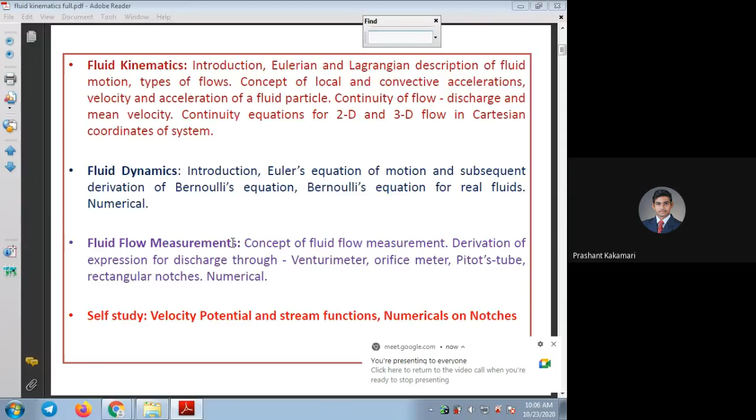So coming to that left out problem - this PDF file or the notes of the third unit, I have combined all the things and shared in the classroom. So here I have combined the PPT as well as handwritten notes for your reference.

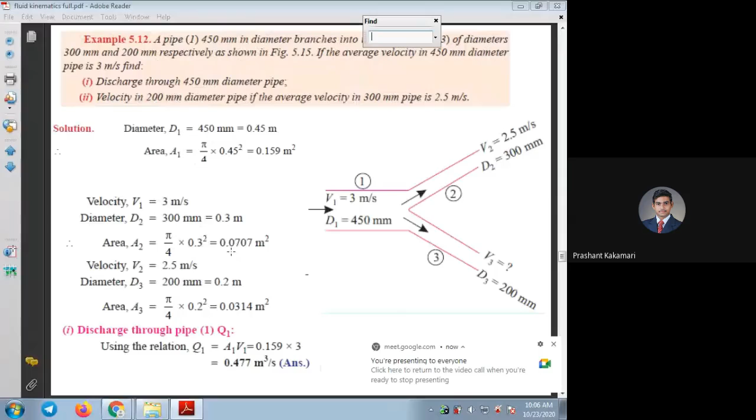A fluid flow field is given by the velocity, capital V, in three directions with magnitude given in vector form, that is x square y into i plus y square z into j minus 2xyz plus yz square into k. So ijk are the directions of the given flow in x, y, z directions, and magnitudes given are in algebraic form - x square y in x direction, y square z in y direction, 2xyz plus yz square in the z or third direction. They have given this velocity in vector form. Prove that it is a case of possible steady incompressible fluid flow.

So here one should again recall, for a steady flow, what should be the continuity equation? In the continuity equation, we are neglecting dou u by dou t, or change in velocity with respect to time, which will be 0, because we are not going to consider the changes of velocity with respect to time.

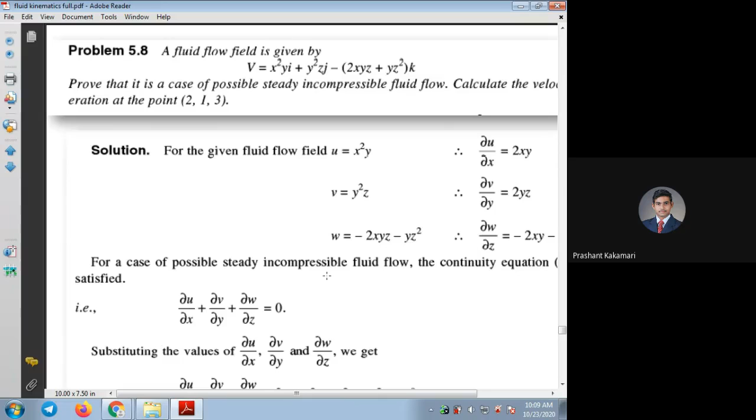So now coming to the given values of velocity in the x, y, z directions, as we followed in the earlier problems. X direction velocity small u, that is x square y. V in y direction, they have taken y square z. In z direction, they have considered small w, that is this complete bracket with negative sign, so minus of 2xyz minus yz square. So these all three things they have considered.

Now for finding the velocity and acceleration, in the acceleration we need the differentiation of all these values with respect to the given coordinates. So once you differentiate them, what will we get? X square we can get as 2x, because we are differentiating with respect to x for the x direction velocity. So dou u by dou x, you can write 2xy. Then differentiating the second term with respect to y, it will be 2y into z.

Then the third term, if you differentiate with respect to z, what will happen? Z raised to 1 is there here. I can write it as minus 2xy after differentiation, minus, here z square is there, I can write it as 2yz. Like this you can differentiate and keep the terms ready, so that you can substitute directly in the velocity or acceleration, or in the continuity equation also.

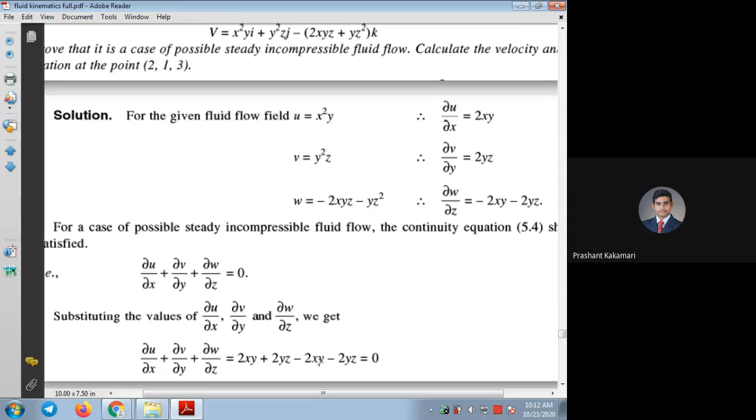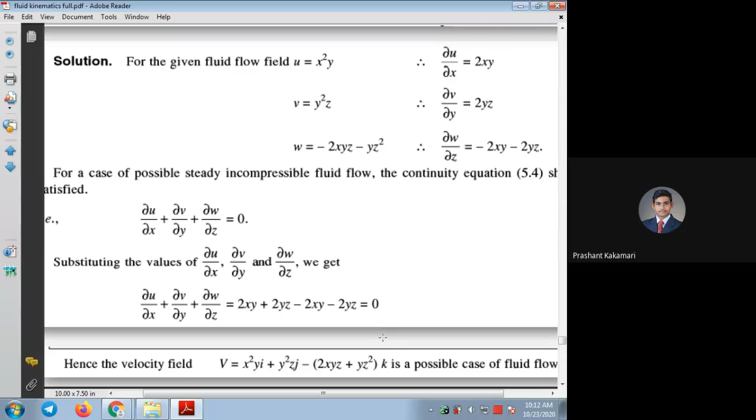So once you substitute, dou u by dou x is 2xy plus dou v by dou y is 2yz, then the dou w by dou z term, that is minus 2xy minus 2yz. If you substitute, you can see 2xy minus 2xy cancels, 2yz minus the last term 2yz cancels, and it will be 0. So by this we can prove that the flow is steady and incompressible. That is proved. Now after this we need to find out the velocity.

So now coming to the procedure to find velocity and acceleration. For velocity, we already know that the given equation itself denotes the velocity in algebraic form. For a given coordinate, we can substitute the x, y, z values and find the resultant velocity or the total velocity. And for the acceleration, we need to differentiate the velocity terms. That's the next step.

So coming to this velocity step, for the given Cartesian coordinate, we have to substitute x equal to 2, y equal to 1, and z equal to 3, which is given in the problem. Just substitute these x, y, z values in the velocity equation, and one can find the velocity in vector form, and using this vector form, the resultant velocity at the given position. So here x is 2, so 2 square into y, which is 1. So 2 square is 4 into 1, 4i.

Second term is y square z j. Y square is 1, z is 3. So it will be 3j. I'll get 3j here. Minus last term, if you see, it is 2xyz plus yz square. So I can write it as 2 into 2 into 1 into z value is 3. Okay. Plus y is 1 into z square, that is 3 square.

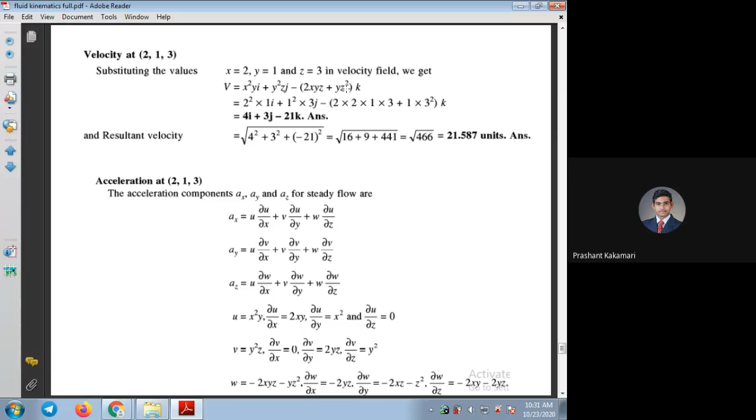Yes, correct. Then last we need to take small w into dou W by dou Z. Dou W by dou Z is minus 2xy minus 2yz. W is given in the problem, that is minus of 2xyz plus yz square, or you can write it as minus 2xyz minus yz square. So see the last term. Last term is minus 2xyz plus yz square, the given term in the main equation, into bracket minus 2xy minus 2yz.

So carefully take these signs, then substitute all these numbers. In place of x you substitute 2, in place of y you substitute 1, in z you substitute 3, and find out acceleration in z direction. Then they have taken minus 2x square y square z minus 2xy square z square minus y square z cube plus 4x square y square z plus 2xy square z.

I think here they have made a mistake in this term. 2xy square z square they have taken. It should be z. 4xy square z square, xy square z square, plus 2y square z cube. According to this first equation, substitute all these xyz numbers and find the acceleration in the z direction. Whether we are getting 63 only, or 39.

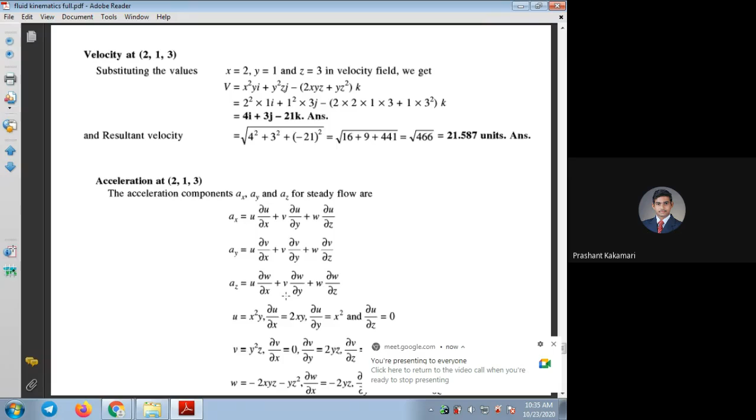The formulas which we found by the derivation, and after deriving and substituting these values, what should be written in these steps should be very clear. If any one value is not taken, or any square or sign is not considered, then the value will be wrong. So please confirm this acceleration in z direction and the resultant acceleration. If all agree with 48.10, we'll consider that result. So make a small change there.

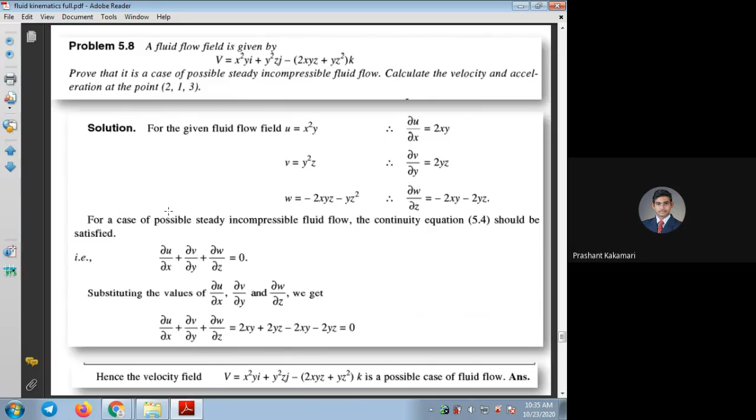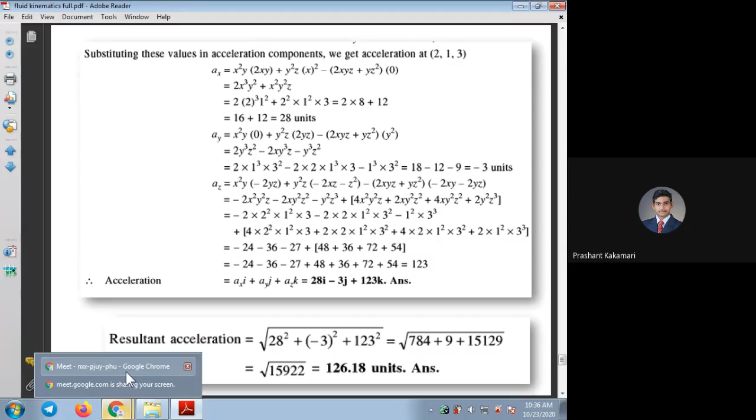So for this given problem in the notes, problem number 5.8, all of you remember, the resultant acceleration is coming around 126.18, as per the other results. Okay. Shall we move to the next slide? If any others have done the calculation, just answer in the chat box. If 126.18 is also not correct, or the given result is not correct, then you can reply in the chat box.

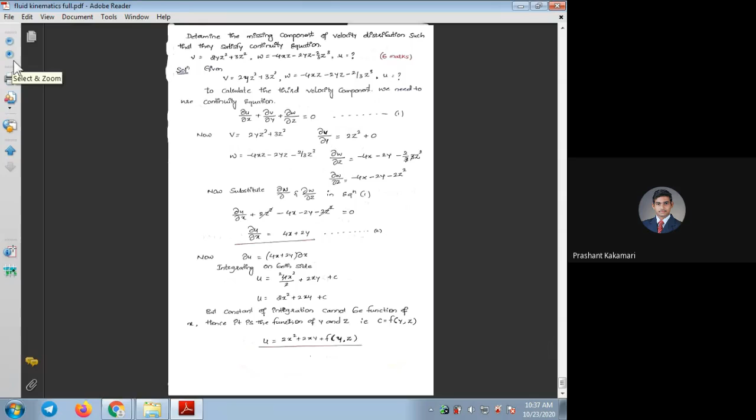Okay. The next slide I will just show here. You find out whether the results are correct or not. Follow the procedure, understand the given problem, and check whether all steps have been properly used and all the substitution is correct in the last slide. It's like a classwork. Take 1 or 2 minutes, and tell me whether the given problem is right or wrong. So take this problem. It's again going back to the basics, finding one of the unknowns.

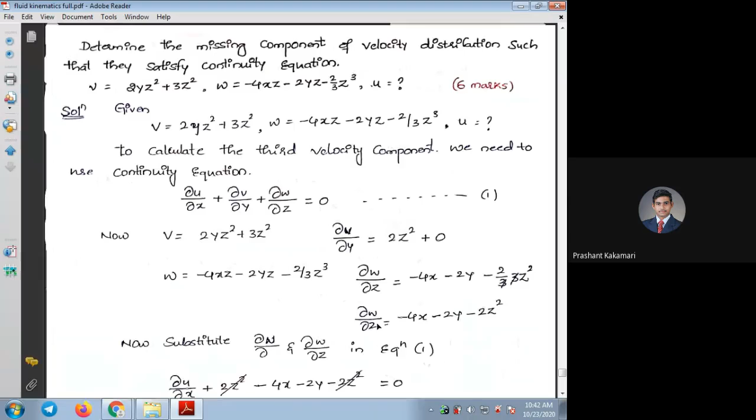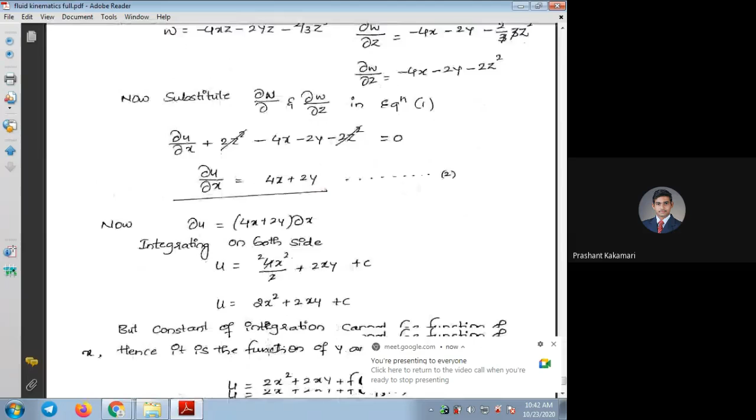U equals 2x square plus 2yx, sir. 1 minute. Yes, what happened? Four x square plus 2yx plus c. Okay, good. Two x square plus 2yx plus c. Yes, Ashish, you got correct.

Sir, I got it, sir. Okay. Yes, another student is telling something. The voice is not clear. See, I think Sunita or Pushpa. So I said answer. Answer is correct. Yes. Okay.

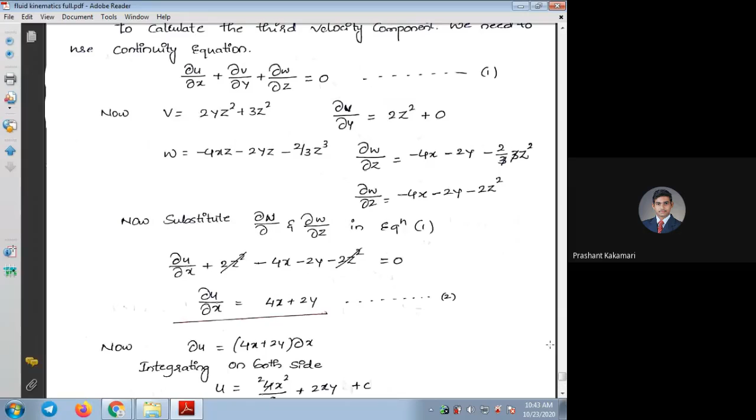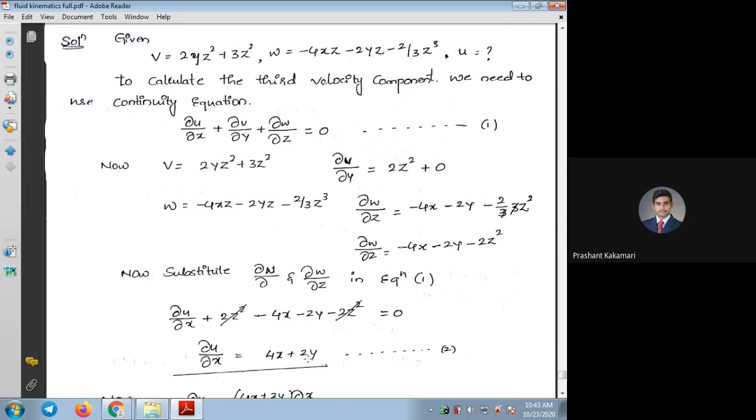So keeping here one of the unknown, that is dou u by dou x is unknown. You can differentiate the v term and w term, and you can find out the unknown term dou u by dou x. Then you have to integrate, because here it is already in differentiation form. That is 4x plus 2y you are getting. You can find out by integrating. So if you integrate, you get 2x square plus 2xy plus c. Okay. So c may be 0 here, or it can be neglected as a constant.

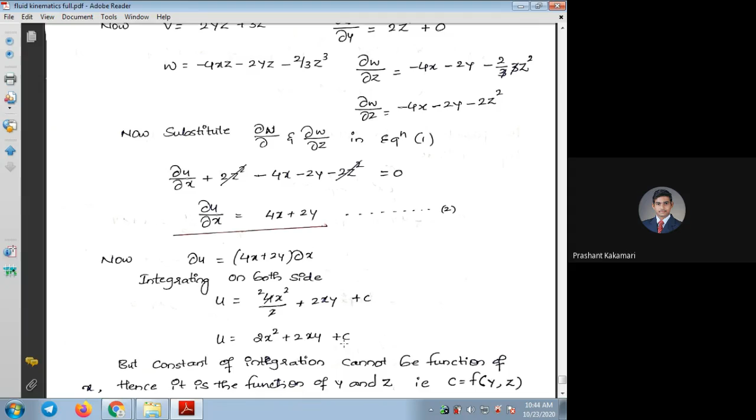Okay, this completes the fluid kinematics part, and in this the self-study part is velocity potential and stream functions. So that is self-study. You can just read the theory part, and if any small problems are there, you can refer. Okay. Now we'll come to the very major part of this syllabus, the fluid dynamics.

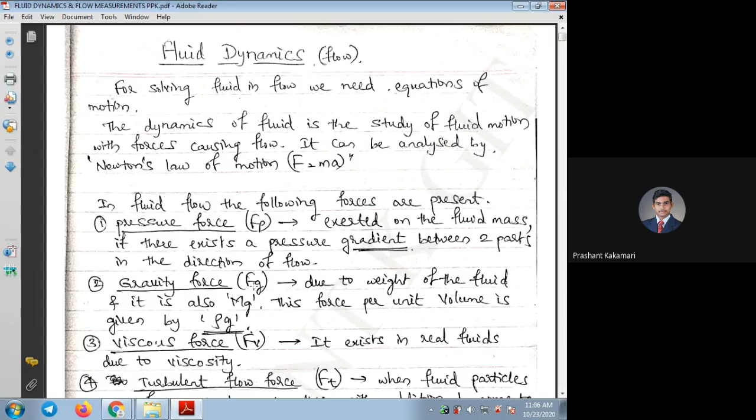Fp denotes the pressure force. Fg is the gravitational force. Then one more force we discussed is the viscous force, that is Fv. Then due to change of type of flow, which we discussed in the Reynolds number, turbulent or laminar flow.

If the fluid is moving at high speeds and some turbulence is created between the fluid particles, there may be exchange of forces between high speed and low speed fluid particles, or even within the same fluid. In this turbulency, the forces which are exchanged are called turbulent forces.

When fluid particles move from one layer to another, or in mixing conditions, or in very drastic changes in speed, there will be continuous exchange of forces between the fluids, and it should be turbulent, where the Reynolds number should be more than 4000. This happens in mixing conditions where layer formation is not possible, so all fluid particles continuously move in independent directions at high speed. In such conditions, we consider that a turbulent force is generated.

Where fluid particles move from one layer to another with additional movements or stress generated, such forces we consider as turbulent force, denoted by Ft.

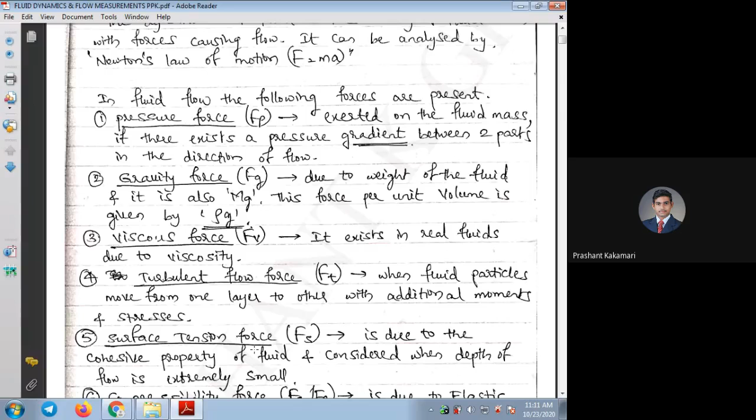Next, coming to the types of equations. Now we need to find different equations for these different forces. If you take the force available in the fluid with respect to Newton's law of motion, that force may be due to pressure, gravity, viscosity, or any other type. If you take real fluids in real applications, we need to take all the forces responsible for the flow. That is written at the bottom here.

If we consider all the forces responsible for fluid movement, for real fluids we don't assume any forces as negligible. In such cases, we can write it as the sum of all forces: pressure force, gravitational force, viscous force, turbulent force, surface tension force, and compressibility force. Due to all these forces added together, the fluid moves in the direction of the applied force. That's why we can consider the net force in a given direction to be mass into acceleration, which we have taken from Newton's second law.

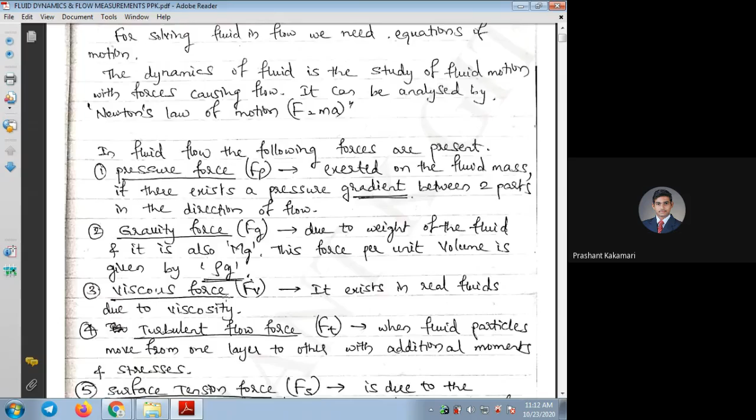So you can substitute that force of fluid as m into a, and we can find out all these forces. If the forces are known, we can find out acceleration of the mass of the given fluid.

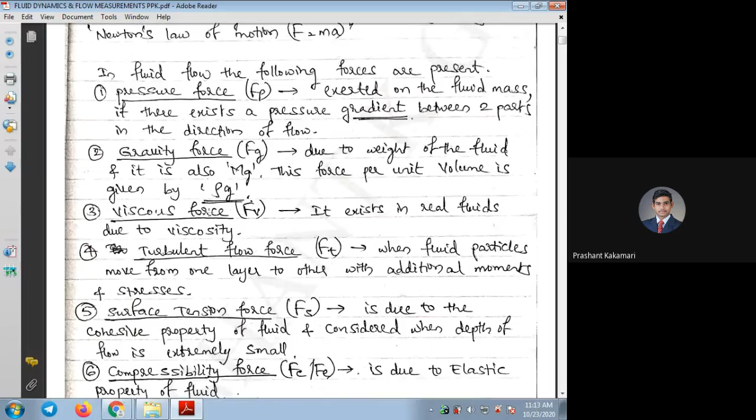Now next is for some cases. We again start with the assumptions, and we have to come to some simplified forms, because many forces are negligible in some conditions, or in some problems they may give ideal fluids, or a different fluid with different conditions. In such cases, we need to consider the simplified form of this equation.

So such forms of equation, if you consider the first condition, if you neglect the surface tension and the compressibility of the flow, that is nothing but the cohesion forces and the compressible elastic forces. If you neglect that, then we can write the forces of the fluid available as due to only the pressure force, the gravitational force, viscous force, and the turbulent force, not the surface tension or the compressibility.

So if you neglect this surface tension and the compressibility of the given fluids, then in fluid dynamics, for such type of equations, we call it the Reynolds equation of motion. Please remember the type of equation. It is not the Reynolds equation, it is Reynolds equation for a given motion of the fluid.

Reynolds is used many times, but in this chapter you remember that for motion, if you neglect surface tension and the force due to compressibility, then such type of equation is called Reynolds equation for motion. That is considered with neglecting force due to surface tension and force due to compressibility, meaning we are not considering the cohesive forces of the fluid. So that equation is called Reynolds equation of motion.

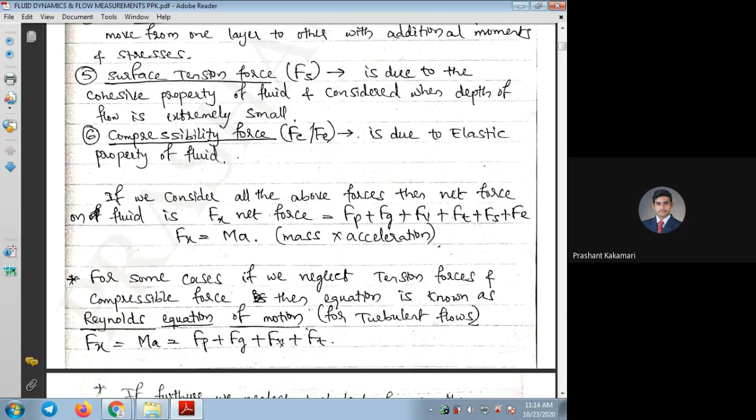Next, we are going to neglect turbulency and other forces. So further, if you neglect the turbulent force, what will be left now? The force generated in the liquid, that is m into a, can be equated to pressure force, gravitational force, and viscous force. This type of equation, where we have neglected turbulency, the surface tension, and also the compressibility force, if you neglect all those three and consider only the first three terms of force, that equation is called the Navier-Stokes equation.

This equation is very important for your aeronautical field, this Navier-Stokes equation. This is the generalized equation. In detail, you are going to study this in CFD or other subjects of your aeronautical studies. So this is going to be used in many applications, Navier-Stokes equations, where the fluid is moving on the given bodies.

Or the body may be moving by considering the fluid in stagnant condition. In such cases, we are going to discuss this Navier-Stokes equation, or in a combination of heat transfer of the fluids or fluid dynamics. There also we are going to discuss this Navier-Stokes equation. This is very important for your different subjects.

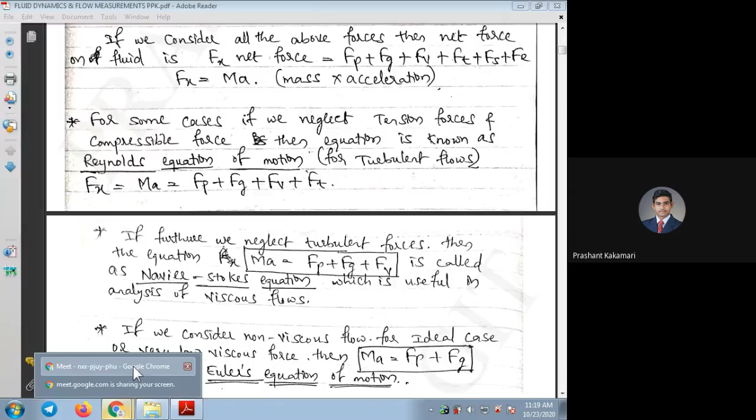Now, by using the Euler's equation in fluid dynamics, we are going to derive the equation for Euler's equation. In this equation, we are just going to analyze the force due to pressure and force due to gravity. Only these two we are going to consider, and we are going to analyze the Euler's equation in detail. Later, after integrating the given equation, we are going to find out the Bernoulli's equation. So these two equations we are going to consider in this fluid dynamics topic. Later, in advanced topics, we may be discussing the Navier-Stokes equation or the Reynolds equations in the future, not in this subject.

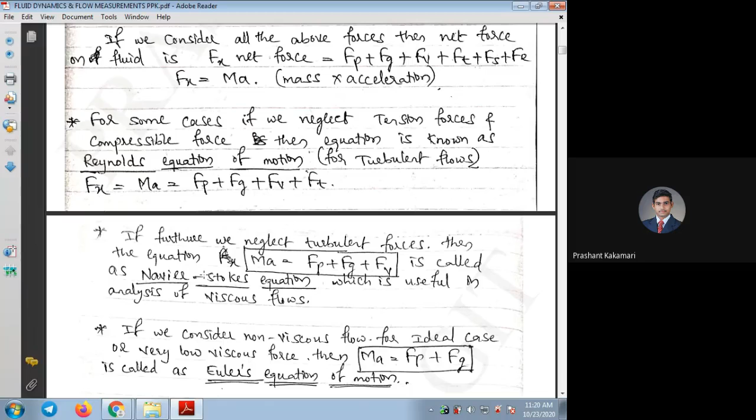Now coming to the Euler's equation. This Euler's equation of motion states that in an ideal incompressible fluid, because we are not considering compressibility, surface tension, or the viscous forces or turbulent forces, when the flow is steady and continuous, the sum of the velocity head, pressure head, and the datum head along a streamline is constant. So this is the definition given by Euler.

It states that whenever a fluid is in motion, assume in mind that fluid is in motion in a river. Don't take any standard shapes, just imagine a river where fluid is continuously flowing. Assume that the fluid is ideal, meaning there is no viscosity present, compressibility is neglected, and the flow is steady and continuous. For a given time, if there is no dam opening or rain happening, then we assume that in a river the water flow is constant and steady for a given range of time. Without addition of flow or taking out water from the river, if it is incompressible like water and ideal with no viscosity...

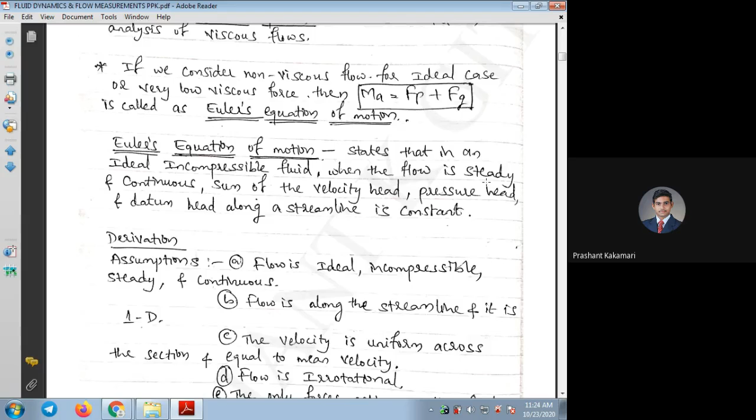So for derivation, all the list of assumptions are given. This we already discussed, you can just go through these points. All these five points are already discussed here. Only one more addition is that the flow is irrotational, or the fluid particles are irrotational. That means you have to assume everything else is neglected - only pressure force and the force due to gravity are considered for our ideal conditions.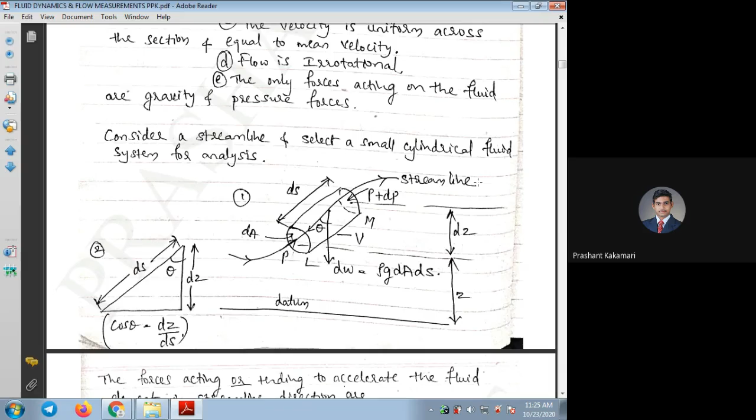Just to zoom it. Yes. Here. So this sketch you can observe here. Flow is taking place in this streamline. The arrow mark you can see. The curve you can see, like an S shape. This is the streamline or a given passage or the path of the fluid particle, which is moving from this P to outside P. Like this it is moving.

Now in this, as per how Euler defined or derived this equation, he considered a datum line here, a datum or reference line. With this reference line, he took the distance to the pressure point P or the inlet of the flow. If you see in this cylindrical passage, the level difference between the inlet side and the datum line, he has considered as the height Z.

And for the small element, the length ds he has considered. For the difference between the heads of the inlet side and the outlet side, he has taken dz as the change in level. So this height is dz, a small change in height, and the head between the entry side of the fluid particle and the datum line, he has taken z.

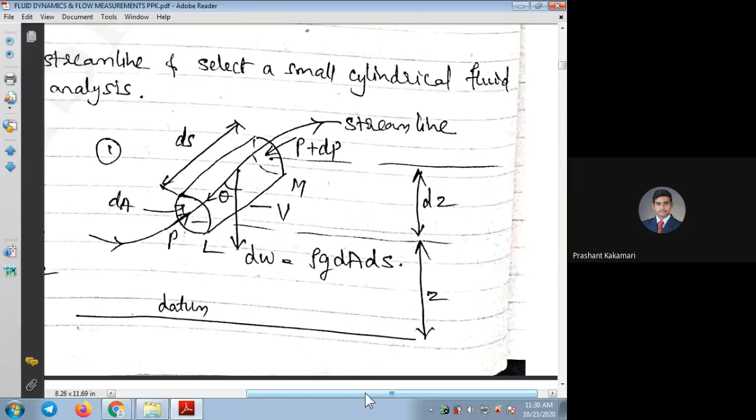Also for the reference, this theta is analyzed here in this sketch. So as per the sketch, I told you theta for considering full length of the fluid particle, that is full length ds. If you take vertically, it is acting downside here. Fluid passage is in the tangential line ds. The tangential length, if you take, that is ds to the fluid particle. The level difference between exit and the entry of the fluid particle is considered dz.

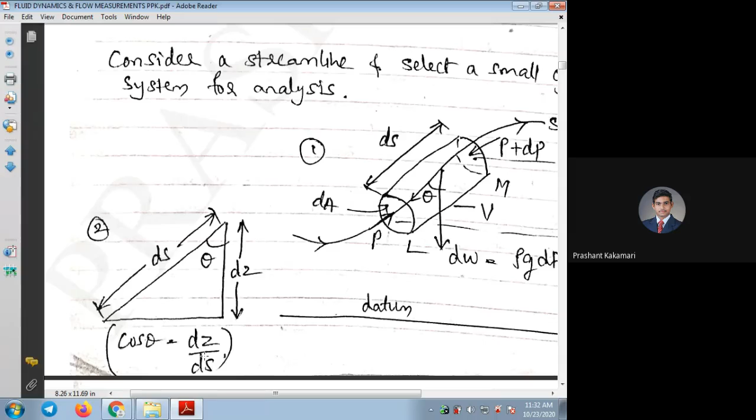Now by knowing this adjacent and the hypotenuse lengths, one can find out this theta in terms of cos theta, because we know the hypotenuse and the adjacent. I can write it as cos theta as dz by ds. If you want to find out ds in the derivation or in the numerical, I can write it in terms of cos theta and dz. Or if you want to find out dz itself, the level difference or the head difference, you can write it as ds into cos theta. So this will be useful in the derivation or numericals. Sketches, all of you understood?

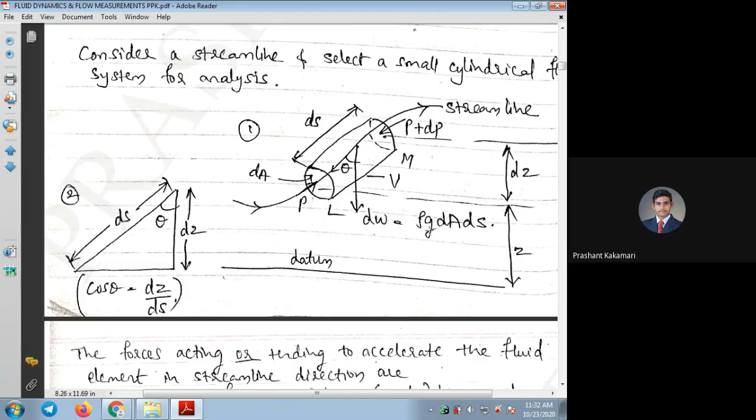Okay, now we'll see how to go by the steps. As per the Euler's equation, we need to add the total pressure forces at inlet and outlet plus this gravitational force equal to total force. So here the forces acting or tending to accelerate the fluid element in the given streamline are: one is the net forces due to pressure. You can see here we have considered the flow in given direction from downside to upside.

So in that direction, the pressure force P is in the same direction, we can consider positive. The other force P plus dP is the opposing force on the other fluid particle. That is considered as minus P plus dP into dA, because these pressures are acting on the given surface area at the inlet and outlet side. So to keep the same area, we have considered one cylindrical area. It may be any area, not only cylindrical. Just for reference, we have taken cylindrical area. So dA is considered with pressure.

That becomes force. So force acting at the inlet side is P dA in the same direction, positive. Other force is acting in opposite direction. So we have taken pressure P plus dP into dA, which is opposing. That's why it is minus. So effectively, I can cancel P dA both sides, and minus dP into dA will be left as the pressure force acting in the given direction of flow.

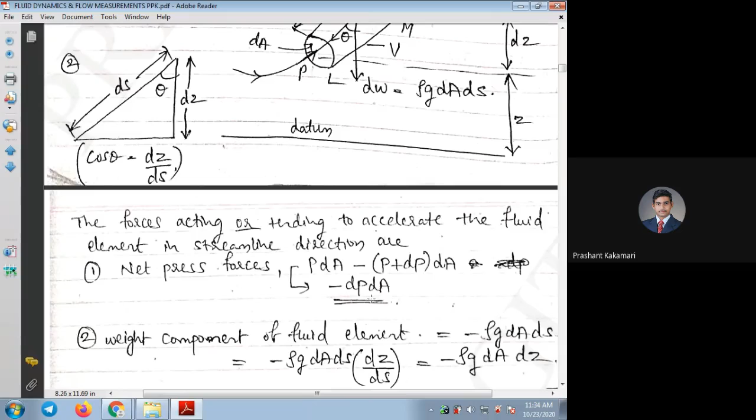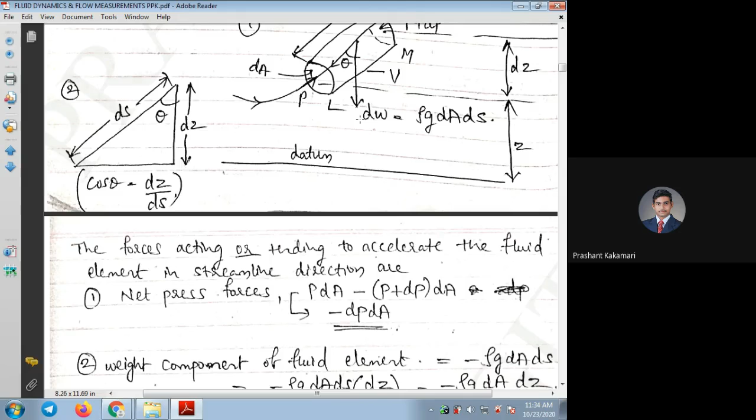The next is weight of the fluid element. Here we have taken dW as rho g dA ds, but this will be acting always in the downside direction towards the earth, towards the ground, or towards the given datum line. According to the given flow direction, flow is taking place from down to top, but weight is moving downside. So it will be opposing the flow. To show how the forces are opposing in the fluid flow, we are taking this weight and the outside forces in the opposite direction.

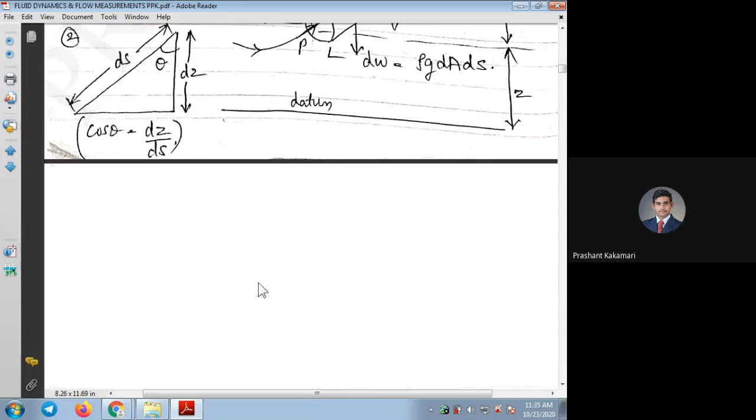So I can write the force due to weight or the gravitational force as minus rho g dA ds. With respect to gravitational force of earth, it is positive rho g dA ds. But with respect to fluid element, it is flowing in this ds direction. Is that clear? It is making some angle theta here with respect to weight.

So I can write it as rho g dA ds into cos theta, because that is not the complete weight of the fluid acting downside. It is acting in a tangential line, in the streamline of the flow. So that component of the weight is rho g dA ds cos theta, which is acting downside. That's why I have taken negative sign.

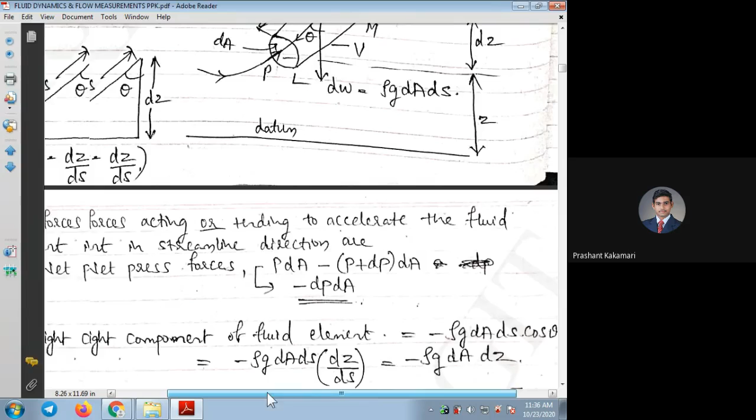Is that clear? So now from analyzing that triangle with respect to theta, ds and dz, I can also write cos theta as dz by ds. So this you have seen here in this case. dz by ds is the cos theta value.

You can write it as minus rho g dA ds dz by ds in place of cos theta. So what will happen now? ds can be cancelled. So we are left with the simplified form, that is rho g dA dz. ds is cancelled.

So in this term, rho into volume, if you see, that is nothing but the mass. Mass, if you multiply with g, it becomes weight. This we already know from the fluid properties. Okay, so this ds term is removed here. The ds term is not present in this weight component. But separately, if you want to find the mass, that will be rho dA ds.

The next is acceleration of the fluid element, because on the left side we want to write the total force or the net force in terms of Newton's second law, mass into acceleration. There we need to write the acceleration term in terms of this given sketch. So as per the sketch, the acceleration is change of velocity with respect to change in time, dv by dt. And by chain rule, we can write it as dv by ds into ds by dt without changing any results of the differentiation.

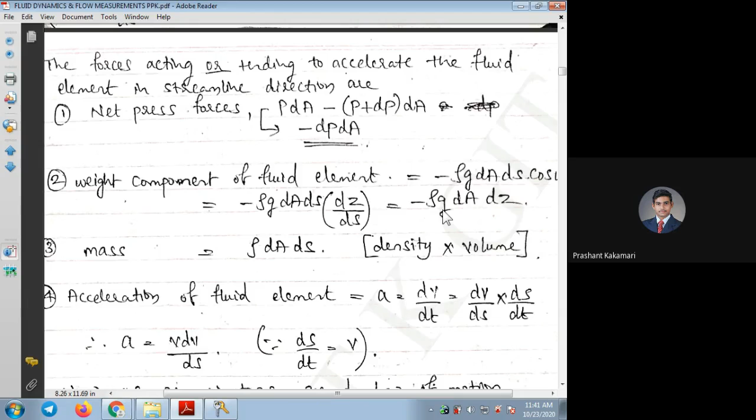On the right side of the equation, we need the sum of the net force due to pressure, that is minus dp dA, plus the weight of the fluid component acting in the downward direction, which we have taken in simplified form as rho g dA dz. So I hope all of you understood the 4 terms, why we are writing them in 4 steps and why it is important in the next step.

Okay, we'll repeat the sketch also, or only the steps, or from the start of the derivation? Okay, only steps.

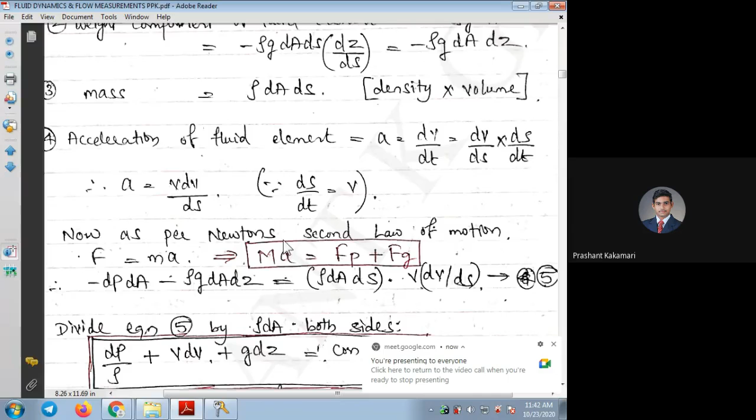Only steps means, you can see here, we need the total force applied to the given fluid in terms of pressure force and gravitational force. And from Newton's second law, to simplify the equation later, we may also require mass into acceleration. So from the above equation, F equals ma equals force due to pressure plus force due to gravity, Euler's equation of motion. For this, we need these terms.

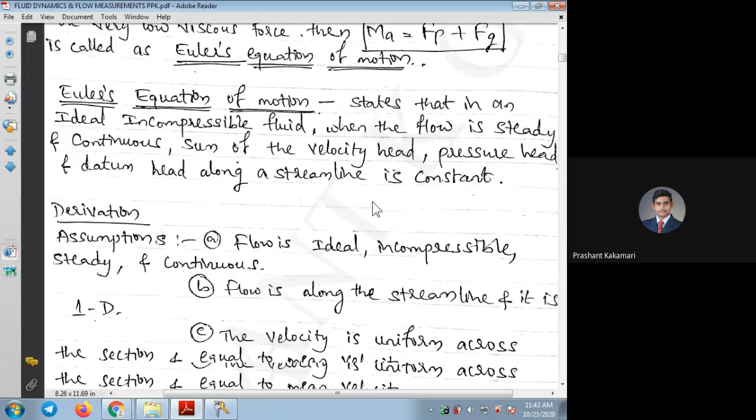So first, what is required? We can find out the weight of the liquid element. So what is the weight of the liquid element?

Density into gravity into volume. So density of the given liquid, may be water. You assume water is given. g is the gravitational force. dA is the area of the cylindrical surface. It may be any shape. Cylindrical surface you have considered, you can take dA.

Because many times we assume a fluid is flowing in a pipe, cylindrical pipe. It may be flowing in a river also, it may be flowing in a channel also, anywhere. But everywhere we cannot consider the proper given area. So we are assuming some area, dA. ds is the length of flow in which we are going to consider that particle. So the considered particle here is up to length ds. So length into area, if you take, it is volume.

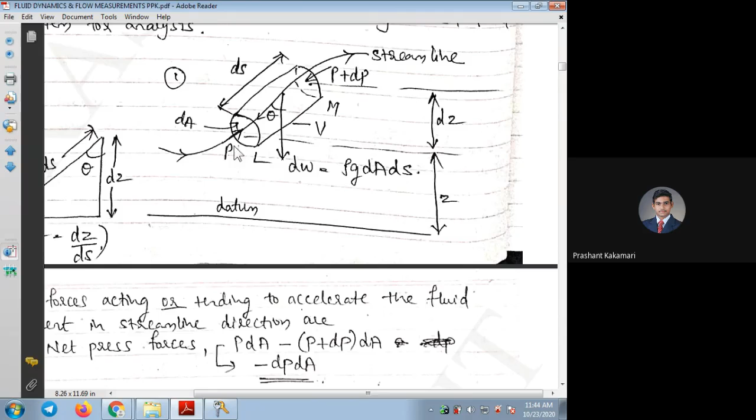Rho gV is the weight of the given fluid, which is acting opposite to the direction of the flow, downside direction. And pressure forces, if you see, due to some pressure only the flow is taking place. Which force? Due to pressure force. So that pressure is applied from the bottom side, that we consider as P. It may be more or less, we don't know. So that P is applied on the bottom side.

Whatever the pressure is applied on any fluid particle, if it is incompressible, the same pressure is applied on the other side, Pascal's law, or the hydraulic jacks or the JCB. You can see whatever the force or pressure is applied on one side, without compressing the fluid, the fluid will transfer the same pressure on the other side also. That is P.

Plus dP is what? The resistance due to other fluid particles which are on the top side, or that pressure force may be due to the circular pipe which is opposing the flow also. Is that clear? So initially you have to assume the fluid is in stagnation condition. Once you apply the pressure, it will start moving. So to apply this pressure, you have to overcome this extra force also. That is denoted by P plus dP.

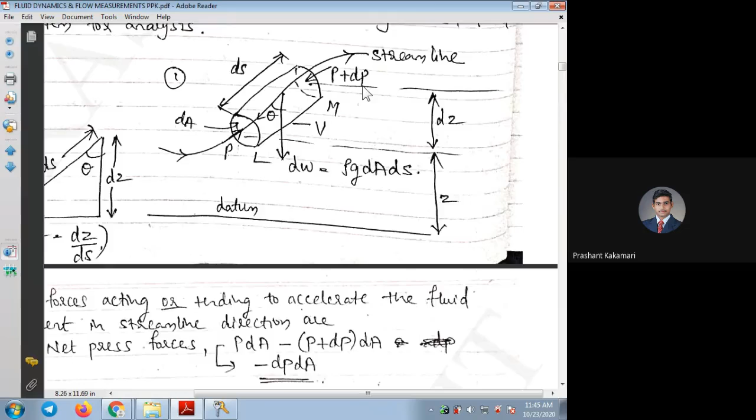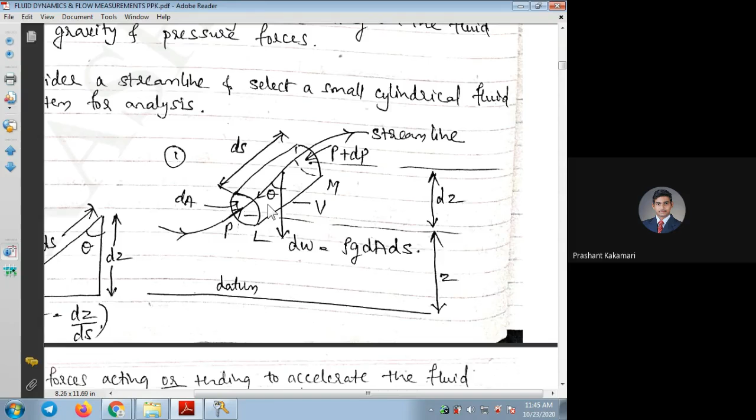So if you simplify, I can write it as minus dP dA, effective pressure force in the given direction. And weight, you can see it is acting downside. So this weight of the fluid particle, here we have taken direction as a vertical direction. But in the direction of flow only we are writing the equation. In that direction, it is acting at an angle theta. So to consider that angle theta, we have taken this triangle, ds, dz and theta. And according to this triangle, we know hypotenuse and adjacent side.

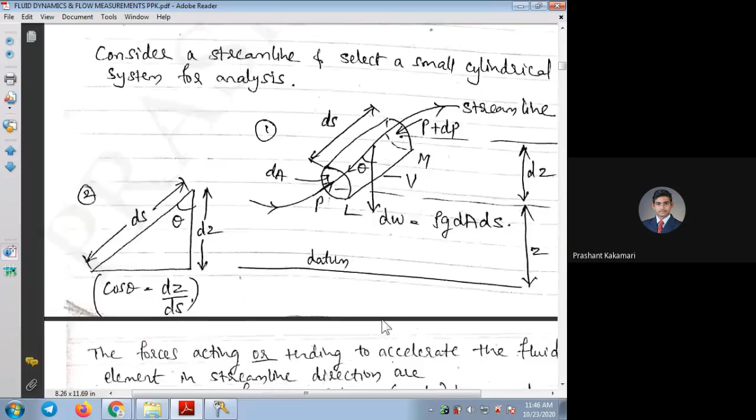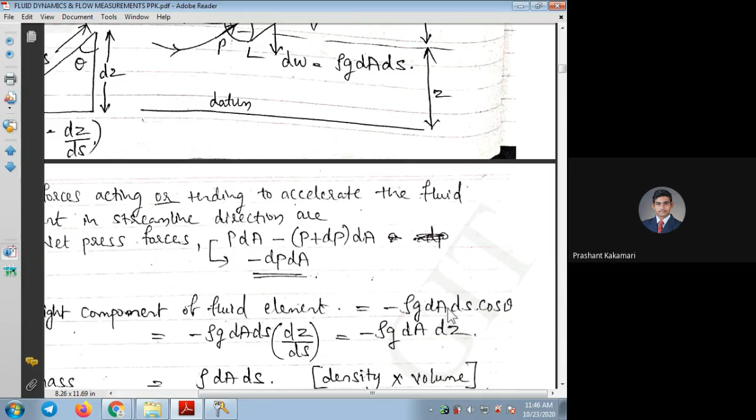Then I can write it as cos theta. That is minus, downside direction. In the flow direction, rho g dA ds is the weight of the liquid. In the flow direction, it is cos theta. In vertical direction, it is only dA ds, not with cos theta. Okay, that is weight.

Mass is what? Mass is just divide that above equation by g. Without gravitational force, if you consider, that becomes mass. Mass is rho into V. So rho into dA ds. Here we are not focusing on the triangle because mass is generally taken not with the direction. That's why gravitational force is not considered in the mass.

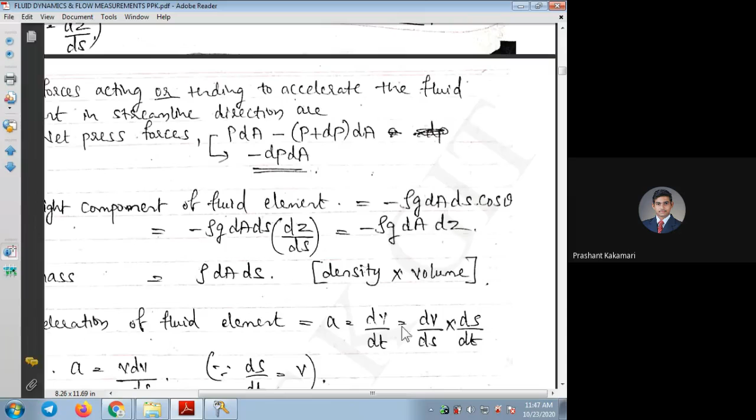Then acceleration. Acceleration, you know, change of velocity with respect to change of time. So this is just split up, written with respect to some distance. Distance is known for the fluid particle, that is ds. So in split up form, I can write it as dv by ds into ds by dt. What is velocity? Velocity is change in distance with respect to change in time. So I can replace this ds by dt in simplified form, that is v.

So the dv by ds we are going to keep as it is. dv by dt, if it is there, it is acceleration only. But dv by ds is what? Change of velocity in space. So change of velocity with respect to distance, we are keeping as it is. So we can write acceleration as v into dv by ds. Now it is clear?

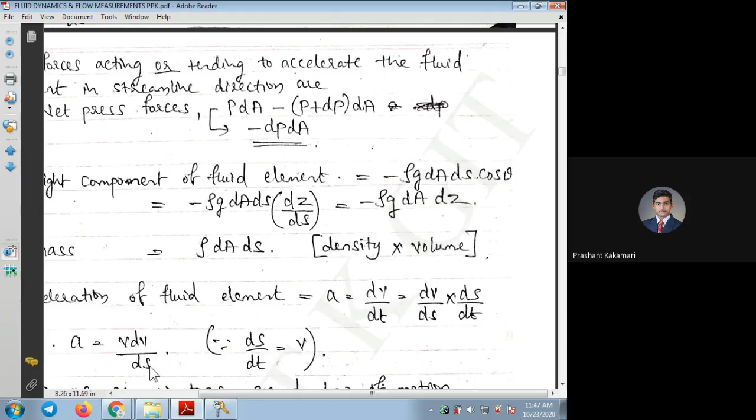Okay, we'll stop this class today. Next class we'll complete the derivation and we'll also derive Bernoulli's equation, and we'll take some problems. And after those problems we'll go for flow measurement. Okay, thank you.